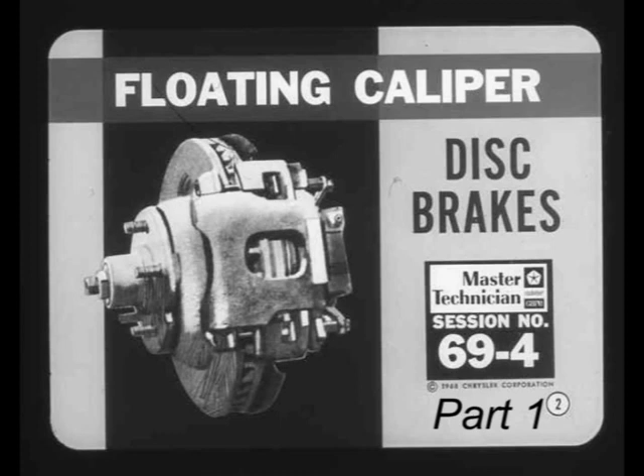Hey, that must be one of those new one-cylinder disc brakes. I still don't see how it works and how one cylinder can do the work of the 4 cylinders we have in our other disc brakes.

I can see you have a lot to learn about this new brake, Joe. In the first place, it's called a single piston floating caliper disc brake. But maybe Tom and I better explain exactly how it works. How about it, Tom? Sure thing, Tech. Let's get acquainted with the main working parts first, Joe.

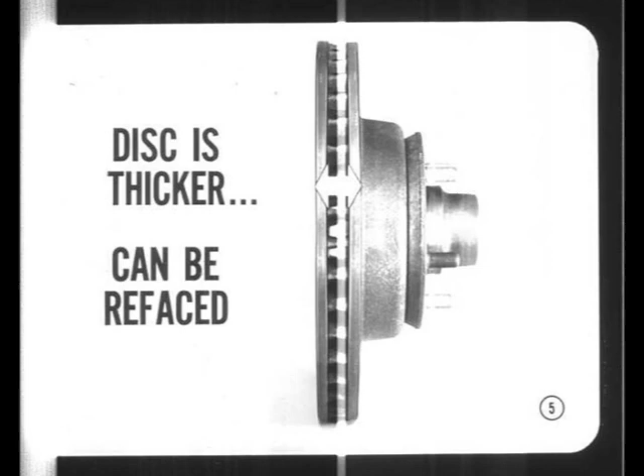Notice that the disc is much thicker than the ones used with our other disc brakes. A positive method of retaining the shoes in the caliper makes it safe to reface the discs. However, if you reface one side, you must reface the other side without rechucking the disc. That's the only sure way of holding the maximum allowable variation in thickness to 1/2 thousandth specified.

1/2 thousandth? Is it really necessary to hold it that close? It sure is, Joe. More than 1/2 thousandth variation in disc thickness will cause objectionable brake pulsation. There's no reason why you can't hold that spec if you use the right kind of refacing equipment.

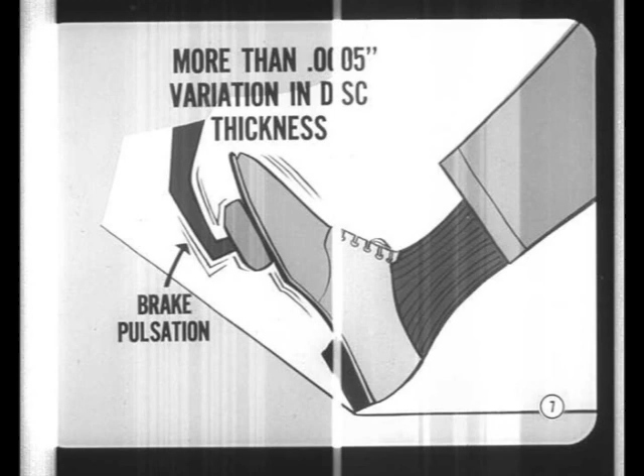How about disc runout? The maximum allowable runout, measured 1 inch from the edge of the disc, must not exceed 2.5 thousandths. Well, how much metal can you take off when resurfacing a disc?

You must not remove more than a total of 50 thousandths of an inch. And you must not reduce disc thickness to less than 1.2 inches. For example, this could be 40 thousandths from one side and 10 from the opposite side, or any other combination that doesn't exceed a total of 50 thousandths.

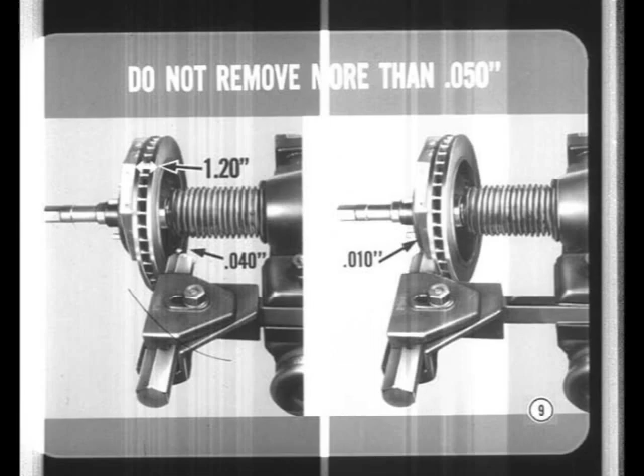You'll find all of the details of inspecting discs, measuring runout and thickness, and machining discs in the service manual. So let's look at the rest of this brake.

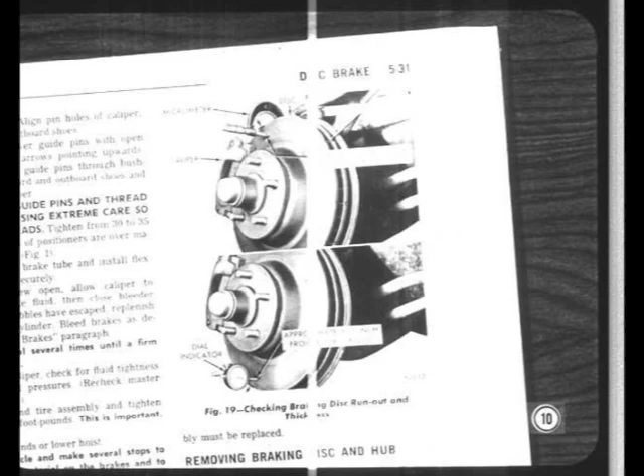The adapter is the backbone or fixed support for the brake assembly. It's bolted to the steering knuckle, so it takes all of the braking loads, something like the support plate and anchor of a drum brake.

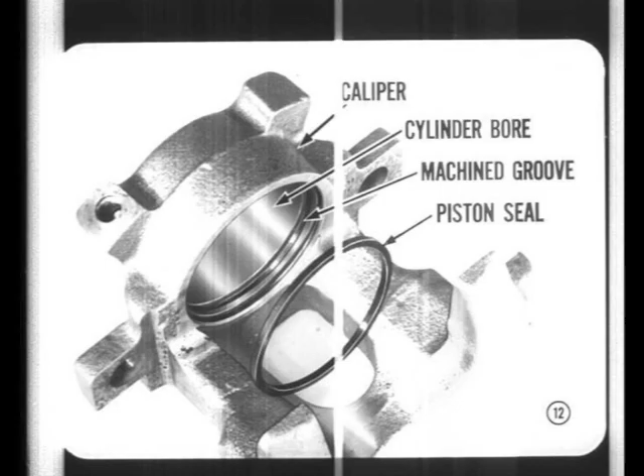Now let's look at the movable caliper. The caliper is a one-piece casting with a single cylinder bore on the inboard side of the brake. A square-cut rubber piston seal fits into the machined groove in the cylinder bore. A large single piston is used. It's nickel and chrome plated to provide very good resistance to wear and corrosion. A rubber dust boot protects the piston and cylinder bore.

But let's see how these hydraulic parts look in cross-section. When hydraulic pressure is applied to the piston, it moves outward, and the seal moves in a rolling motion with the piston. When the brakes are released, the distorted seal acts like a return spring and pushes the piston back into its bore. The way that dust boot works is kind of interesting too, Joe.

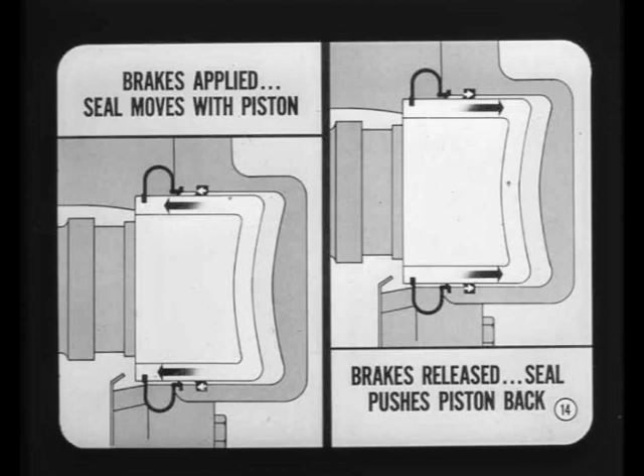The dust boot forms an airtight seal at both the piston and cylinder. A lip rides on the piston to keep the boot in its groove inside the cylinder. The other lip of the boot is a tight fit in the piston groove.

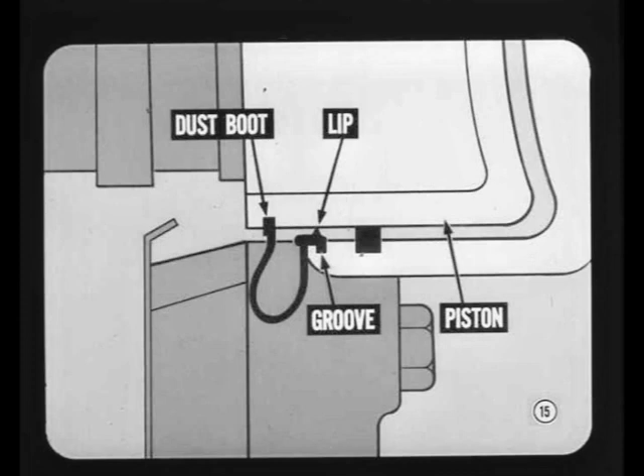Now here are some servicing musts. A special tool should be used to remove the piston from its bore. This will reduce the possibility of scratching the piston surface, which is the actual pressure sealing surface. Do not use air to blow the piston out of the bore.

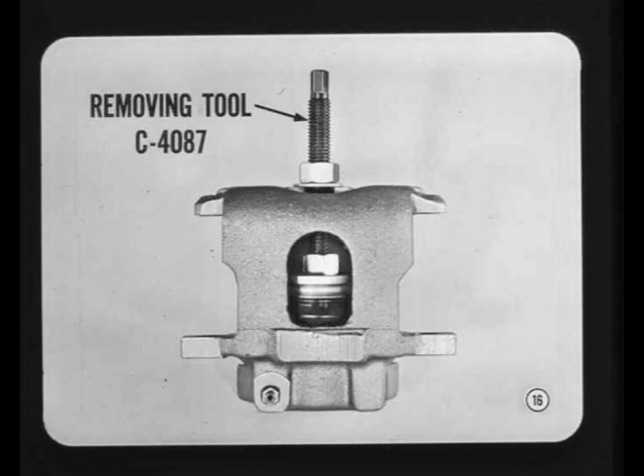It's extremely dangerous. A special hone is available for cleaning up the cylinder bore. Be sure and hone the land between the piston and the seal grooves. And it's extremely important to clean out both these grooves.

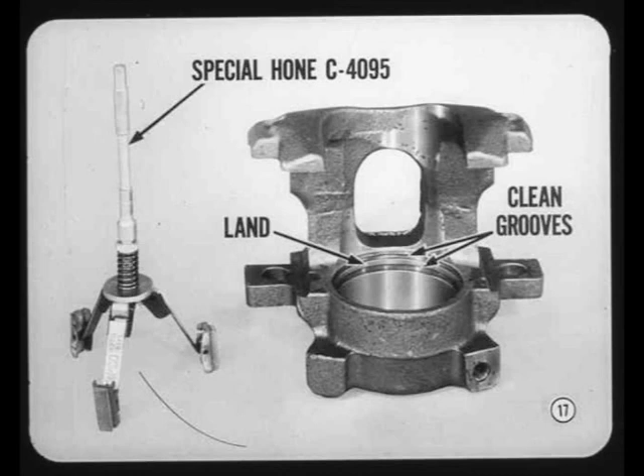A bronze wire brush and a little brake fluid will do the trick. Don't scrape any metal from the grooves. Do flush out all traces of dirt and grit after cleaning or honing.

Never reuse a seal or dust boot. Install new ones. Use the special lube provided with a seal kit when assembling these parts. Don't use any other type of lubricant. And don't use a hard or sharp tool to install a seal or the boot.

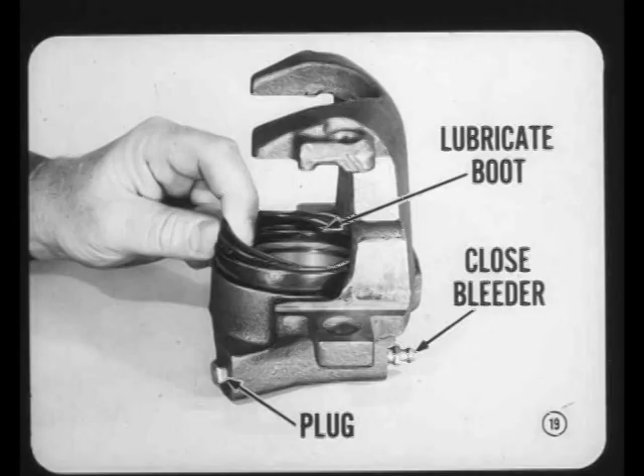Use your fingers. Maybe you better show Joe how to install that boot. Glad to, Tech. Lubricate the boot with the special lube provided, and using the fingers only, work the outer lip of the boot into the groove in the cylinder. Then close the bleeder screw and plug the pressure inlet with a brass plug having the correct thread.

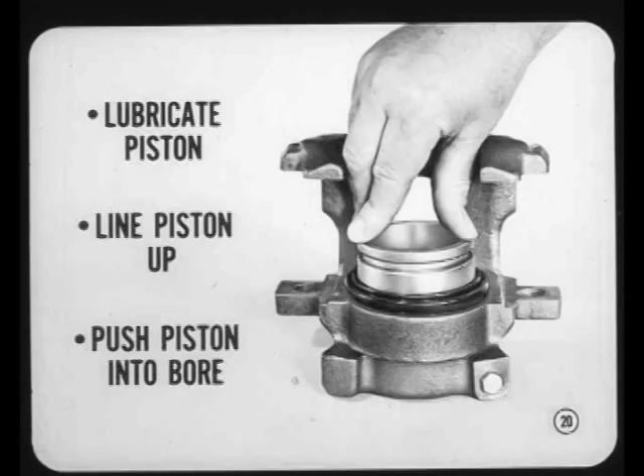Next, lubricate the piston. Slip it through the dust boot and line the piston up squarely with the bore. Press down on the piston, and the trapped air escaping past the piston seal will pop the inner lip of the boot into the boot groove of the piston, slick as a whistle.

You'll find complete service instructions in your service manual. However, some of the tips and precautions are worth repeating. We'll flag them as we come to them. Now, let's get back to our caliper.

The brake shoes fit into the caliper. The inboard shoe rests against the piston. The outboard shoe simply bottoms against a machined surface at the outboard end of the caliper. And now let's take another look at the adapter.

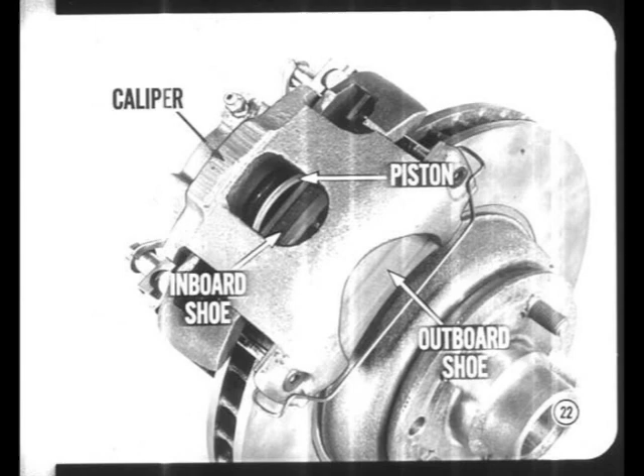Two steel guide pins are threaded into the adapter. They are stationary, non-moving parts that help guide and position the caliper as it floats in and out. When assembling the brake, the guide pins slide through four rubber bushings in the caliper and pass through holes in the brake shoes, providing positive shoe retention in the caliper.

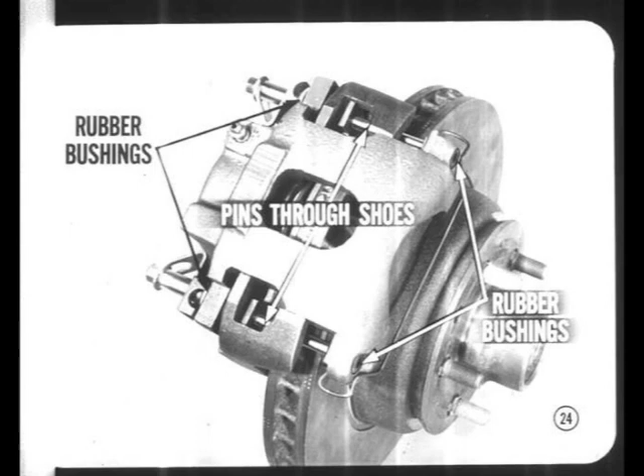Now let's take a look at the assembled adapter and caliper. When the guide pins are installed, positioners at the inboard ends of the pins hold the caliper outward when the brakes are released so that the outboard shoe is away from the disc. They actually bend and close up as the linings wear.

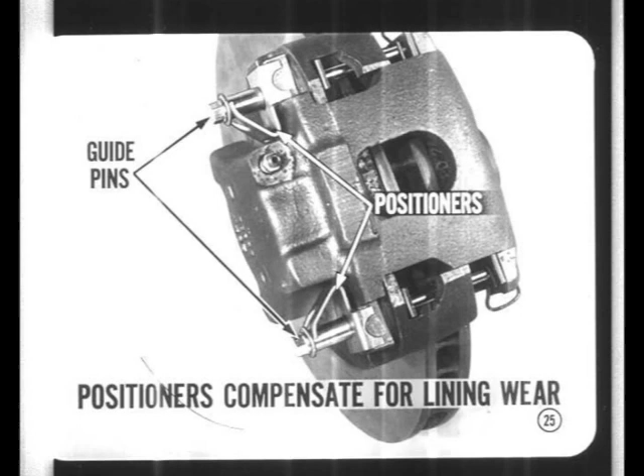Because of this, you must use new positioners when new shoes are installed or the caliper is serviced. You must also install new rubber bushings, because caliper movement gradually wears them. Here's a tip on installing those bushings.

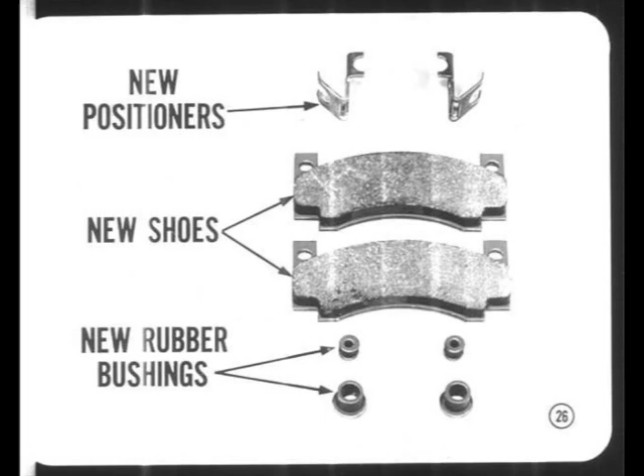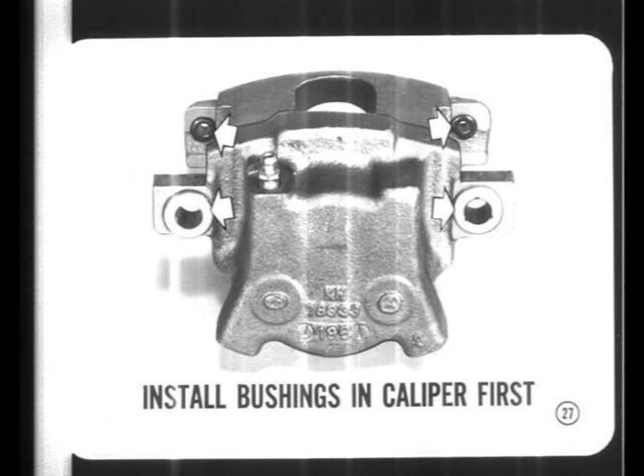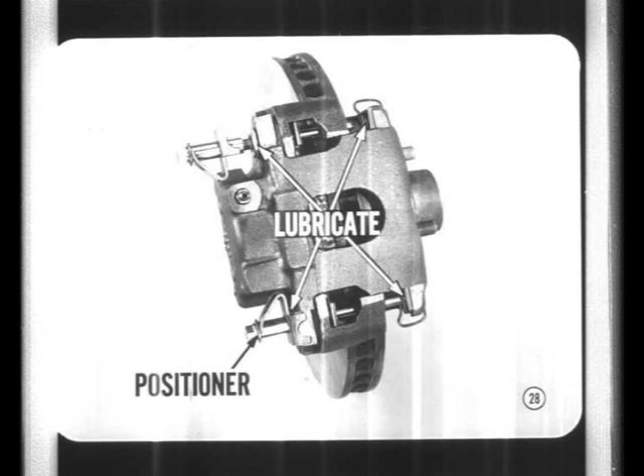If you try to put the bushings on the guide pins and then push them into the caliper, the bushings won't seat properly. If you should succeed in getting the pins started in the adapter, you'll only manage to ruin the bushings and the positioners. Do these guide pins have to take all the braking loads?

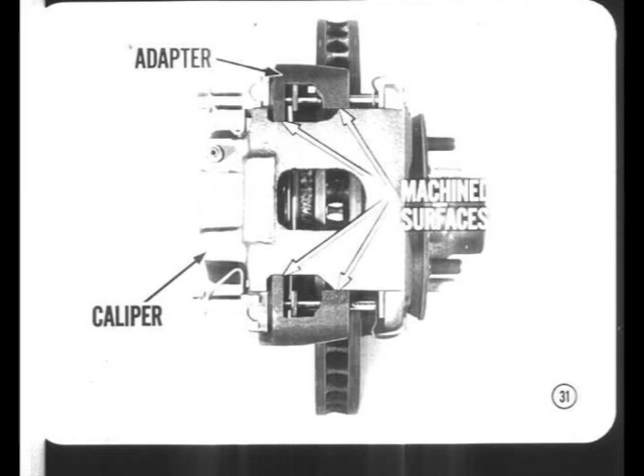No, Joe. As a matter of fact, the caliper is a precision sliding fit in the adapter. At four points, machined surfaces on both the caliper and the adapter maintain caliper alignment, and these surfaces take all of the braking loads.

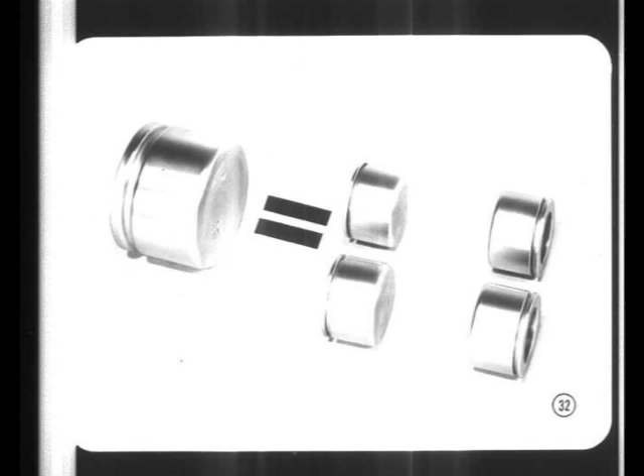Before we go any farther, I think it's high time we explained how one big piston can do the work of four smaller ones. Several things enter into this, including the basic principle of equal and opposite action and reaction. Come again, please? Here's a familiar example of what that means, Joe.

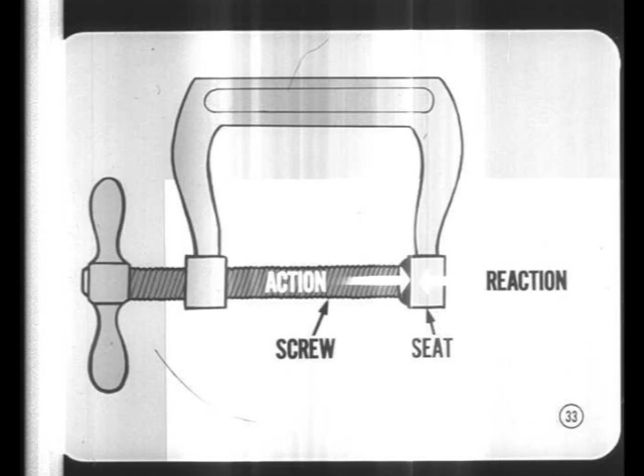When you tighten the screw of a C-clamp against its seat, the screw pushes against the seat. That's action. But the seat pushes back against the screw an equal and opposite amount. That's equal and opposite reaction.

If you find this hard to believe, try putting your hands out in front of yourself and leaning your weight against a wall. Now imagine what would happen if someone suddenly took the wall away so that it wasn't pushing back against your hands. I get the picture.

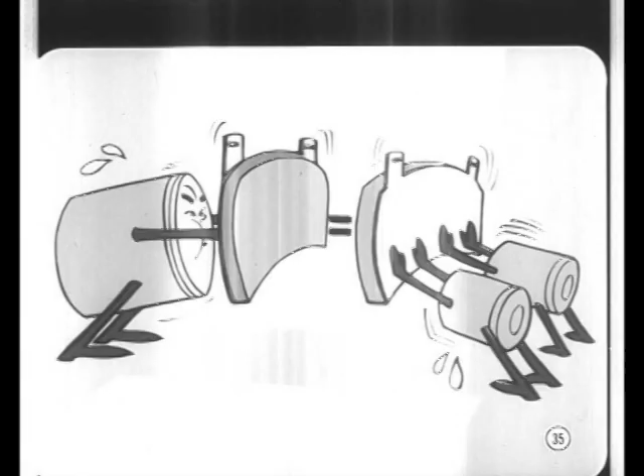Good. So now you understand that two of these small pistons used in other brakes do the acting, and the other two actually provide the reacting force. In other words, our one big piston only has to do the work of two of the small pistons. But that big one doesn't have as much area as two of the smaller ones.

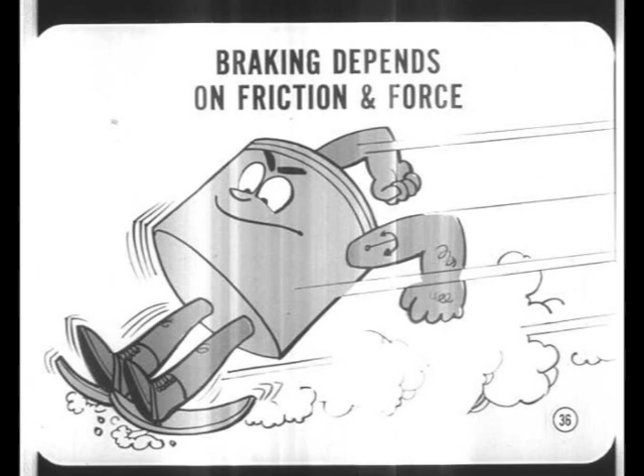How come? You're forgetting that braking depends on lining friction as well as piston force. The coefficient of friction of the lining used with the single-piston brake is about 50% higher than the lining used with a four-piston brake. This more than offsets the difference in piston area.

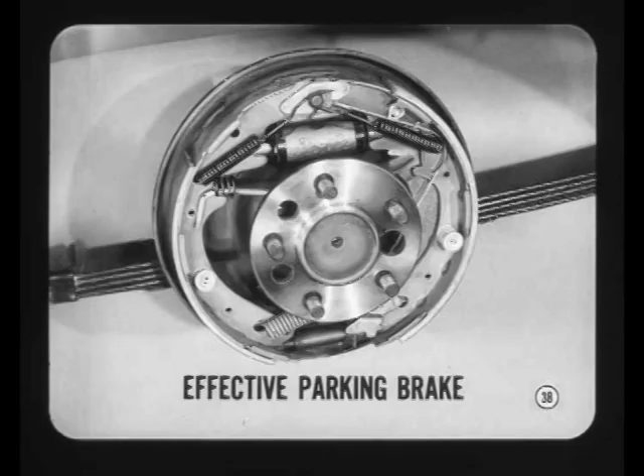Okay, Tom, I'm convinced that one piston can do the work of four, but I have another question. Why don't we use discs in the rear as well as in the front? Disc brakes in the rear would complicate the parking brake design. Drum brakes provide a simple and effective mechanical parking brake system. To provide good parking brakes with discs would require very high apply force and a bulky, complicated leverage system.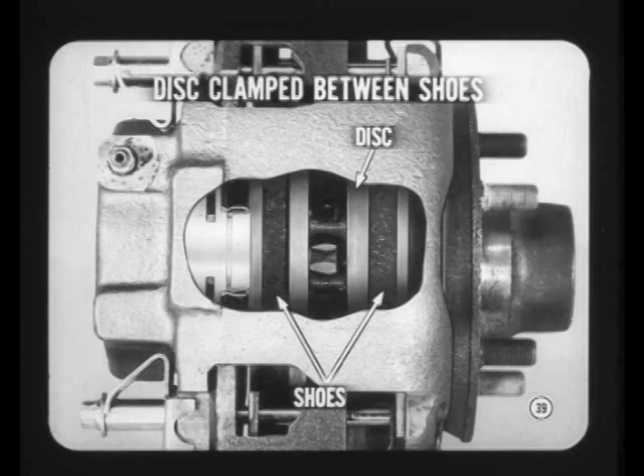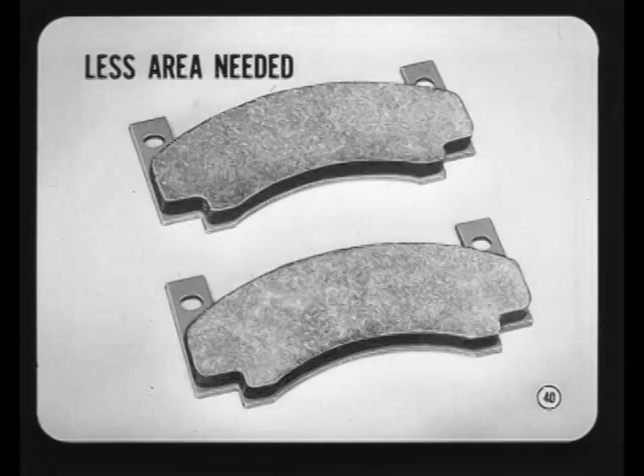Speaking of apply forces, much higher brake shoe force is used with disc brakes. Since the disc is actually clamped between the two shoes, the apply force is always equal on both sides, so there's no disc distortion, even at high temperatures. Less lining area is needed than with drum brakes to provide equal or greater braking.

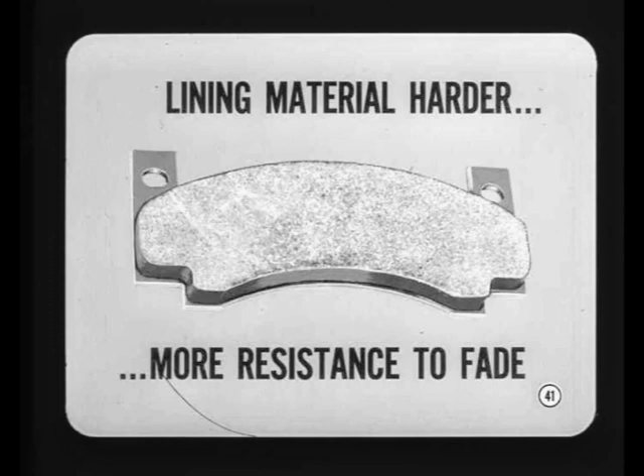However, the disc brake lining material is quite special. The lining material is much harder so it can withstand the high compression force needed to produce good braking. These harder linings can stand more heat and are more resistant to brake fade. In addition to being harder, disc brake lining is much thicker to provide good lining life.

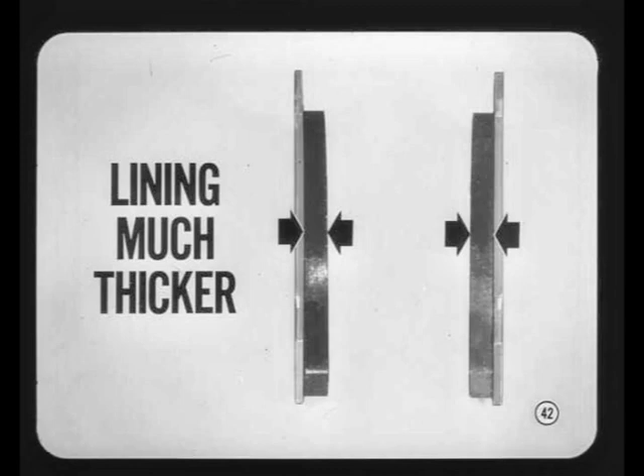As the lining wears, the piston moves farther out of its bore, so disc brakes are inherently self-adjusting. Since the disc brake pistons are big and move outward quite a way to compensate for lining wear, more fluid capacity is needed in the reservoir of the master cylinder.

Before we get into the master cylinder and the rest of the hydraulic system, I'd be much obliged if someone would please turn the record.